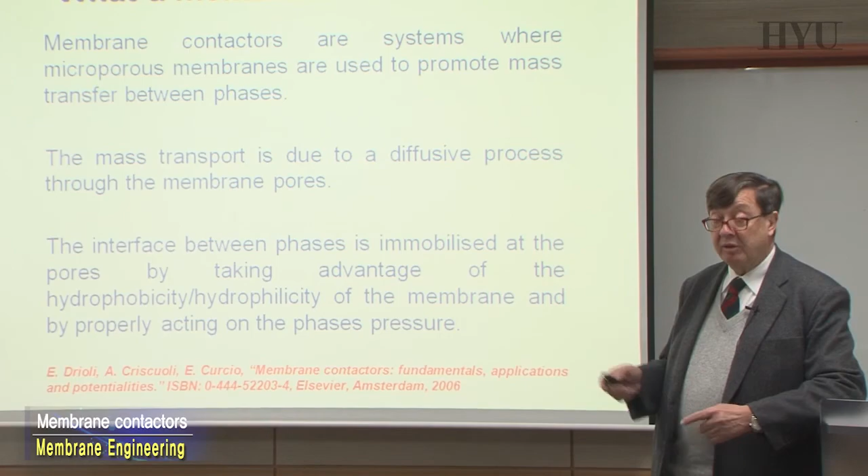Some of these operations are becoming more and more popular—membrane distillation is a typical case. Others are also in progress: membrane emulsifier is another interesting case. We are developing a study on membrane crystallizers, not yet at industrial level, but very interesting and important for the possibility to improve this kind of operation significantly.

Membrane contactors are systems where, in general, microporous membranes—not dense membranes like in reverse osmosis, gas separation, nanofiltration, or pervaporation—are used to promote mass transfer between phases. By the way, this system already exists in nature: our skin is the best example of a membrane contactor. The mass transport is generally related to diffusion across the membrane pore, and the interface between different phases is immobilized at the pore by taking advantage of the hydrophobic or hydrophilic character of the membrane. This is a very general definition of what we are talking about.

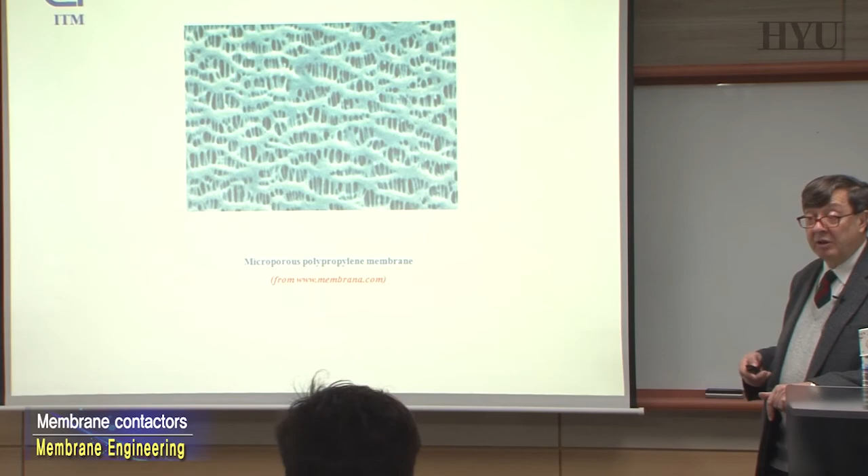By the way, some years ago we wrote a book in this area where you can find some general references. The kind of membranes we will discuss, compared to the membranes we discussed a few lectures ago, are always microporous, so the solution-diffusion mechanism is not part of the membrane system. They can be hydrophobic or hydrophilic depending on the kind of system being discussed.

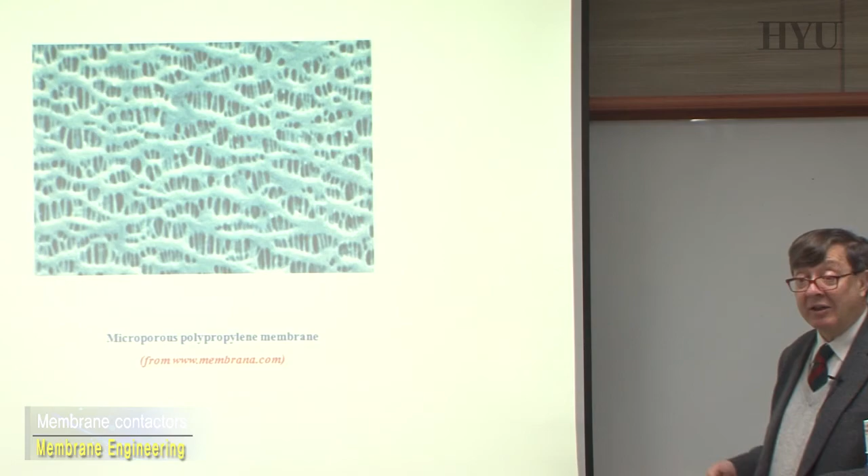For example, most of the systems we are discussing have water as the solvent—aqueous systems—so we will basically use hydrophobic membranes. These will avoid penetration of the liquid phase, the salty water, into the membrane itself, so only vapor passes across. Vice versa, you can use hydrophilic membranes when using non-aqueous solvents to do the same with a different kind of membrane. Non-aqueous systems in membrane contactors are not yet much developed, but it's an interesting research field that will grow significantly.

We will discuss two of the major membrane contactors that are growing significantly and where we have specific knowledge and ongoing research. Number one is membrane distillation, as I was mentioning before.

Distillation is a very basic system present in most thermal separations that people develop today. Membrane distillation, based on membranes, is not yet as common, and you're more familiar with distillation towers where evaporation and condensation take place across different plates of the column. In membrane distillation, the same phenomena take place at the interface between liquid and vapor phase, at the mouth of each pore. Instead of having a thousand different plates as in a distillation column, we will have billions of pores across the membrane.

It's quite interesting to remember that all these properties are very consistent with the basic properties of process intensification: flexibility, modularity, automatization, remote control, very low footprint are all present here.

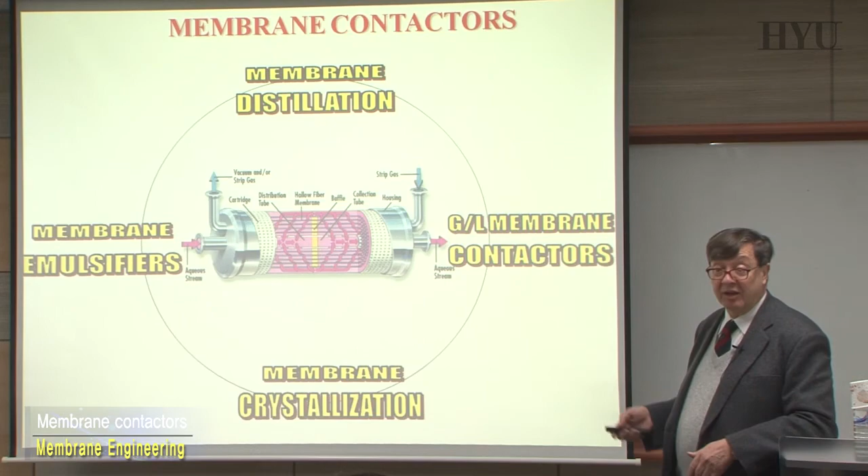The software to operate these membranes as a crystallizer or emulsifier means the operator has to be very smart—knowing the software, the system, and how to change the driving force and operating conditions to make an emulsifier instead of a crystallizer. This is very consistent with the basic properties of process intensification that we discussed at the beginning.

Here are listed the most traditional contactors that we are studying today. And as you can see here, membrane distillation is one.

In membrane distillation, what you have is basically a membrane, microporous, hydrophobic, making contact between a liquid phase and a gas phase or another phase on the other side that can also be liquid, vacuum, or gas. The driving force normally is a delta T, a difference in temperature across, small because this is a porous system.

So if you have to move the gas across, this resistance is relatively not very significant. That can be a typical example of a case in which there are interesting opportunities to realize also on large scale the same units. And the limit to the mass transfer is just the different resistance in the boundary layers on the feed side, on the permeate side, and in the membrane itself.

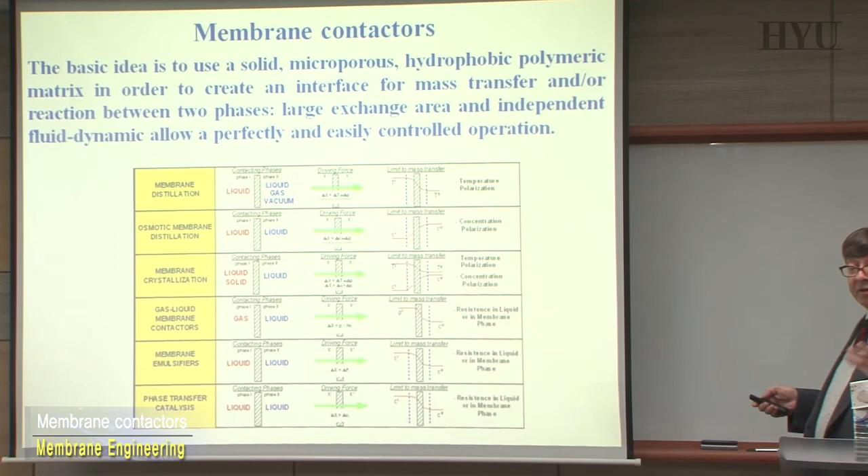Let's anticipate that one of the drawbacks in membrane distillation is not concentration polarization, as we discussed in reverse osmosis, but temperature polarization. This is another kind of polarization that can significantly affect the performance of your system. Colleagues and PhD students around the world are studying and developing modeling to better understand membranes more appropriate for controlling temperature polarization, and that's a significant important area of research for the future.

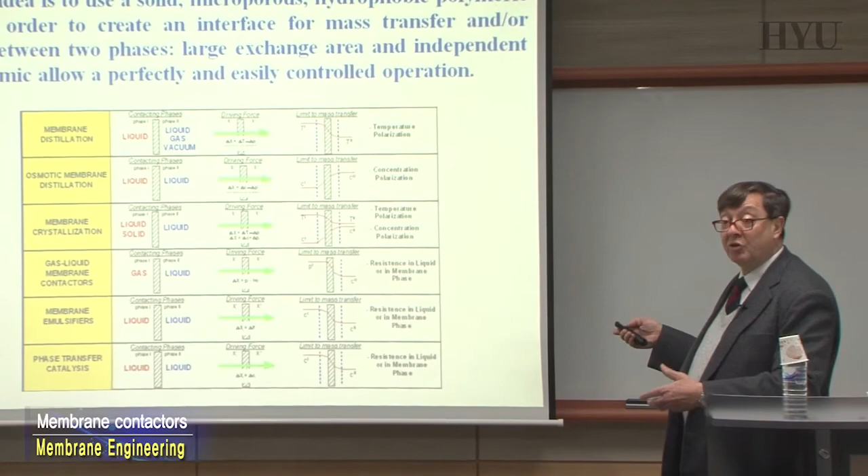There is a modification of membrane distillation we call osmotic membrane distillation, in which we have a significant difference in concentration across our membranes. You can realize the osmotic gradient, similar to what we call forward osmosis. We have a draw solution on one side, very high concentration, that will be able to move water across the membranes.

And in some cases, for some specific applications, osmotic membrane distillation is useful because it improves the performance of membrane distillation itself. For example, when there's a volatile present in the feed solution and you want to avoid this volatile going across together with water, you can use osmotic membrane distillation. We will mention why.

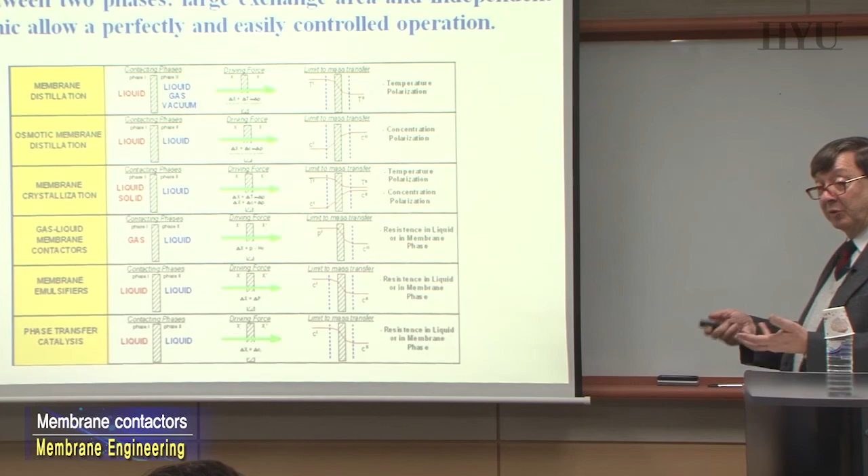What's interesting is that this system can be developed if you understand the mechanism leading to membrane crystallization. Membrane crystallization, for what concerns the hardware, is basically the same units. What you have to do is concentrate to the point that you induce the formation of a supersaturated solution on the feed side. And if you have a supersaturated solution, you can induce crystallization, heterogeneous crystallization.

This is quite interesting, and people in crystallization are now studying it carefully. They are learning about membranes very quickly, because for them it's a totally new way to produce crystals. Crystal is one of the most popular final formulations of most products on the market. If you look at how people are producing pharmaceuticals, food, etc., and how they purify most substances, crystallization is one of the most common ways of doing it.

The final formulation of products you produce are, for example, emulsions. You will also see membrane emulsification, or crystals, or different kinds of powder, but crystallization is one of the most interesting ones. So if you can develop a new system to crystallize product, it's quite interesting.

You will see that in principle, membrane crystallization overcomes a lot of the limits of traditional crystallization or traditional crystallizers. For example, we are able to crystallize specific polymorphs of your mixture. Normally most products appear in different habits when they crystallize. Take amino acids, like glycine: glycine can be in alpha form or gamma form, and the same for most other products.

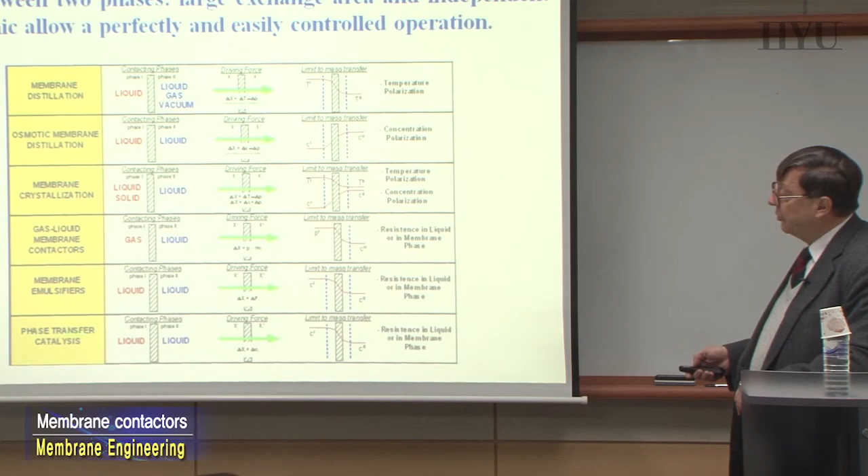You will have other kinds of contactors, such as the gas-liquid membrane contactor, where you can extract and supply gas to a liquid. Membrane emulsification is another very important final unit operation for the formulation of many products. You can also control phase transfer catalysis with a membrane contactor. So there are quite interesting opportunities for doing this.

What is the motivation for trying to develop this kind of system when the system already exists? Because you can crystallize without membranes, you can emulsify without membranes—so why do you have to develop this?

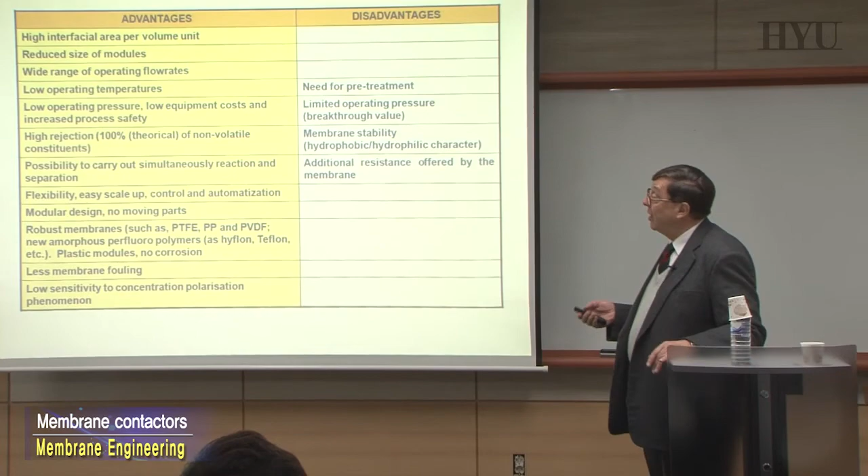Rule number one, most unit operations based on membranes are realizing the strategy, the principle of process intensification. So they are very compact systems, very flexible, with very low footprint. They don't induce too much side phenomena. Environmental impact is minor, etc. So that is rule number one.

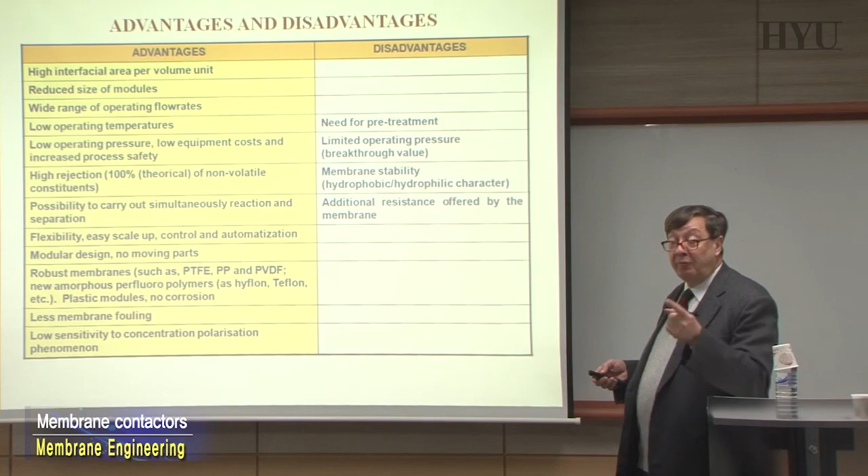Independent from all the other motivations, it makes sense if you believe that tomorrow most processing will require process intensification. That is motivation number one. It's very consistent with process intensification. However, there's more than this.

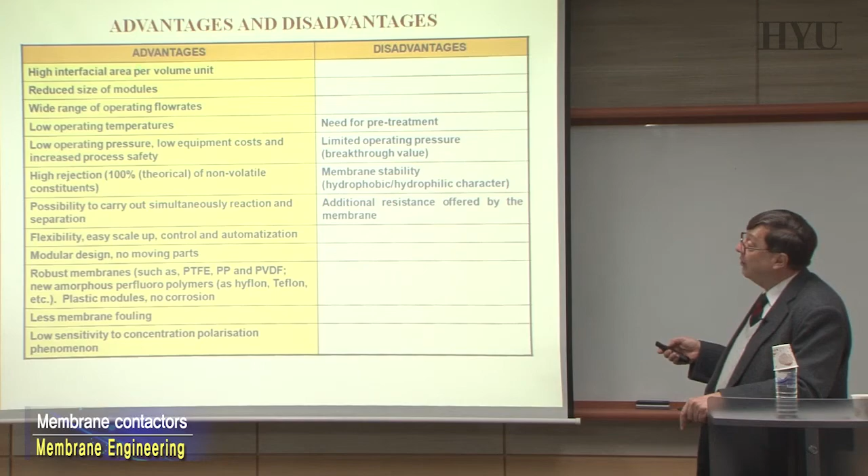For example, most membrane contactors have a very high interfacial area per volume unit compared to normal solvent extraction, distillation, or emulsification systems. Reduced size of the module, wide range of operating flow rates, very flexible in the range of operation.

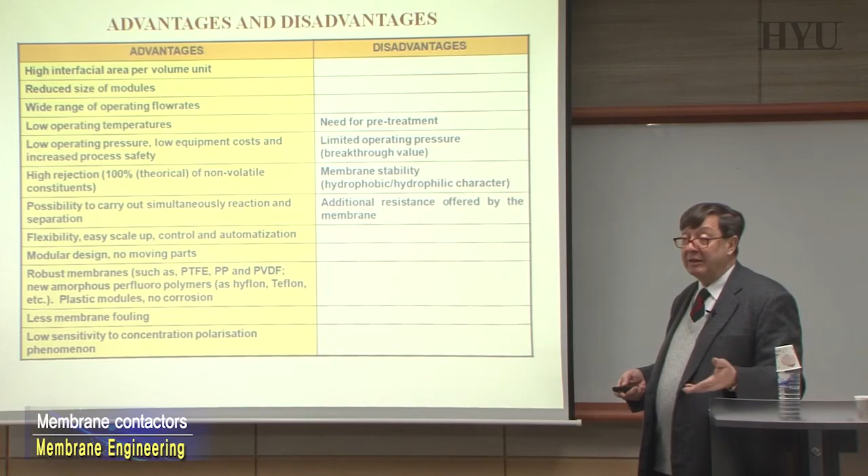They can operate at very low operating temperature. Normal distillation approaches 100 degrees, 90, 120, depending on pressure. In membrane distillation, you operate normally at 30 or 40 degrees. If you want to increase transmembrane flux, you can go to 80 degrees at most, but it's not really necessary. So you can make the same operation at low temperature, which is very important for food application, biotech application, drugs production, etc.

In general, low operating cost, low equipment cost, and pretty safe, no high pressure, no high temperature, etc. In principle, membrane distillation has about 100% rejection. We will see the basics - no salts pass into the gas phase. There's none, compared to reverse osmosis or nanofiltration.

Rejection is always a ratio between concentration upstream and downstream. In membrane distillation, that is theoretically 100%. No sodium chloride will go into the vapor - only water goes into the vapor phase. And also here, you can easily combine separation and conversion. Very flexible, as shown before, allowing automation, possible remote control, modular design.

Membranes are becoming more and more well-developed today. We have good hydrophobic microporous membranes made with polymer, basically amorphous perfluoropolymers. Years ago, there were no real membranes appropriate for this kind of operation. Still today, most of the membranes we use have not been designed for membrane distillation or membrane crystallization - they were designed for microfiltration or ultrafiltration.

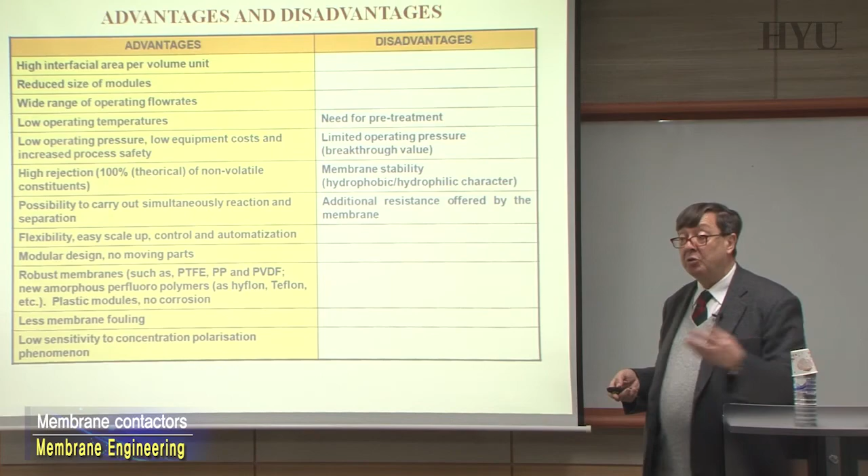That's why some of your colleagues around the world today are working more and more on how to reduce the pore size distribution and produce membranes with as strict and narrow a range of pore size as possible. There are new methodologies for doing this, expensive, but they exist. There is a new way to produce TIPS membranes that some of your colleagues are using in this department, which is one way to reduce the pore size distribution and try to obtain as narrow a one as possible.

That is an interesting result you can achieve. But TIPS has some other problems, meaning you are using polymers with solvents which are not traditional solvents, so that is an area where a lot of work has to be done and is still in progress.

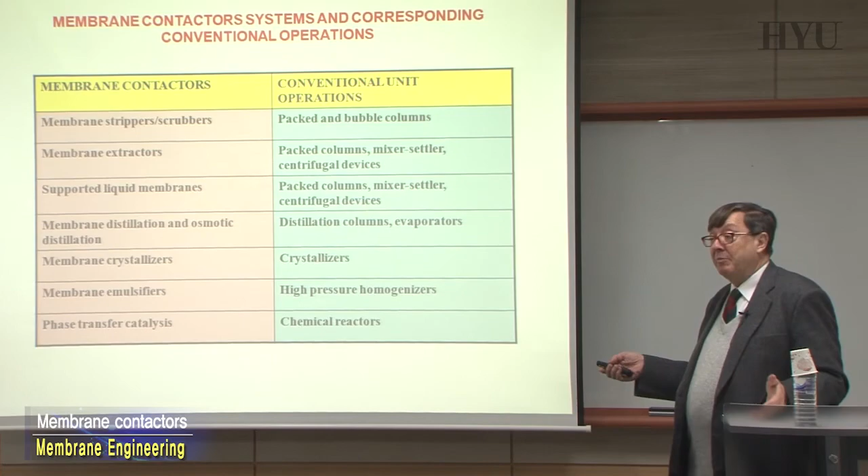I mentioned before that for each membrane contactor we will discuss, in particular membrane distillation and membrane crystallizer, there is a very well established alternative, traditional, conventional way of doing things. So when you want to introduce new technology, you must have strong motivation. You have to convince people that this new technology really gives benefits. Otherwise people say, well, you like membranes, we know about them, but we don't need to change what we have been doing until now. You have to show them there are motivations for changing, good reasons for doing things differently, and slowly people are learning and understanding.

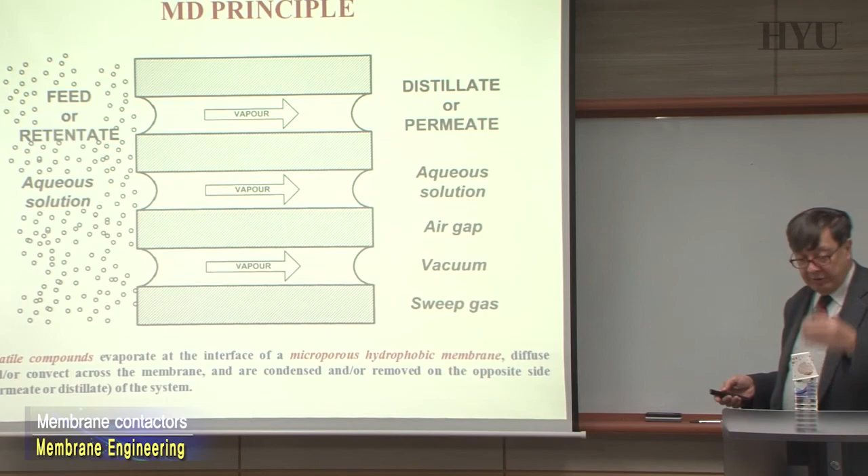So I mentioned we will discuss membrane distillation, and in this picture you have the basic principle of membrane distillation. We have membranes with a significant number of pores of a certain size. The average value can be 0.1, 0.2, or 0.5 microns. That is the typical range in which most membranes today are produced.

On one side of your membrane you have your feed, meaning seawater for example, where the solvent is water in this case. On the other side you can have another aqueous solution, a solvent, water. You can have an air gap, you can make a vacuum, or you can have a sweep gas.

So what's happening here is that at a certain temperature, this membrane is hydrophobic, so the surface energy and pore size are such that no liquid can penetrate. But at the interface between the liquid phase and the vapor, which is in the pore, you have a typical evaporation process: some molecules leave the liquid phase and go into the vapor phase. So the liquid will not penetrate, but single molecules in the vapor phase can penetrate normally, since there is no surface tension to stop just single molecules, so some molecules can penetrate.

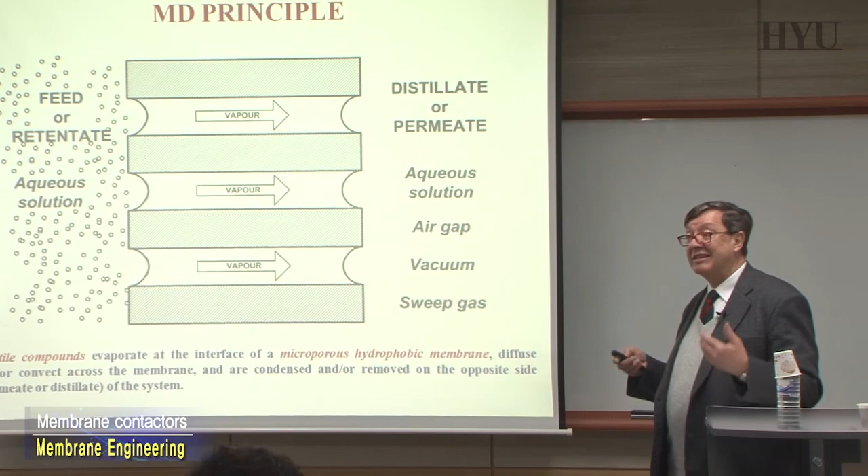Already there is a lot of new design work. There are many engineers studying how to realize this. There's much more interest and effort today in trying to realize this system than in traditional distillation.

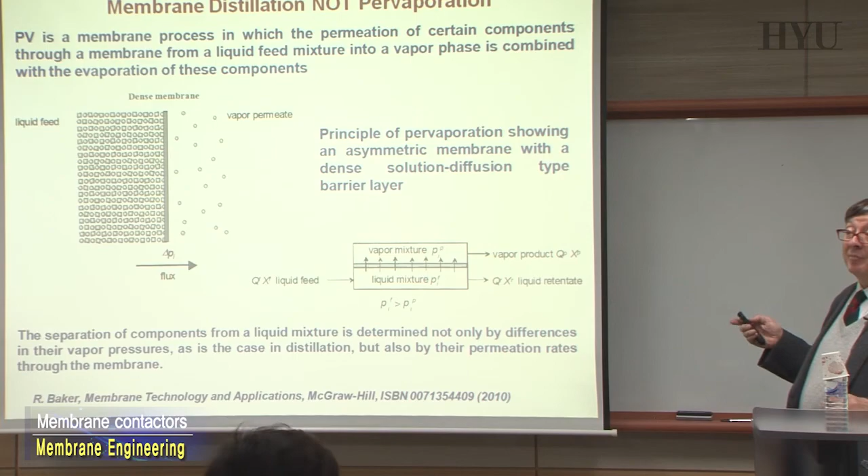By the way, before going to see the different systems, remember that sometimes in the literature there is confusion. People confuse membrane distillation with pervaporation. Pervaporation has nothing to do with membrane distillation. Some people call it thermal pervaporation just because there is a temperature difference, but membrane distillation and pervaporation have nothing to do with one another.

First of all, in pervaporation you have dense membranes, the same membranes you would use in reverse osmosis or nanofiltration. What you have in pervaporation is nothing more than a solubility-diffusivity type of process, exactly as in gas separation or reverse osmosis. What is new is that the driving force and the final properties of the system are not just related to the difference in vapor pressure of the components across the membrane, but also to the permeation rates. So you have a combination of the vapor pressure difference across your membrane plus the permeation properties of the dense membrane system. That is what makes pervaporation interesting for some applications.

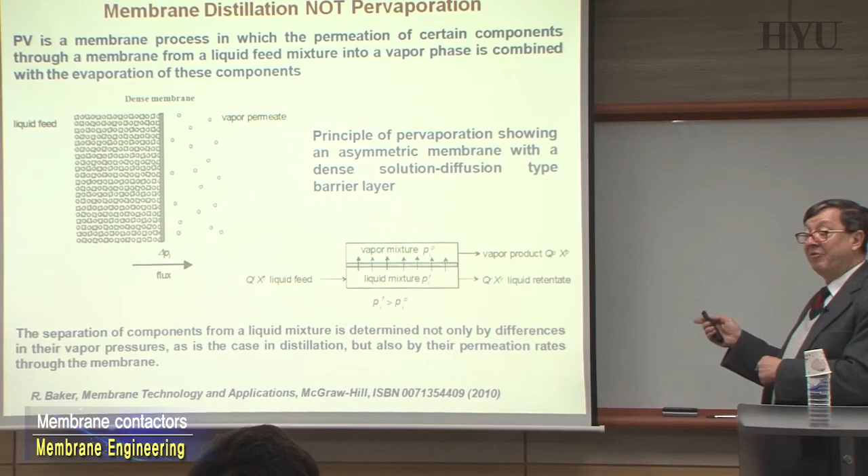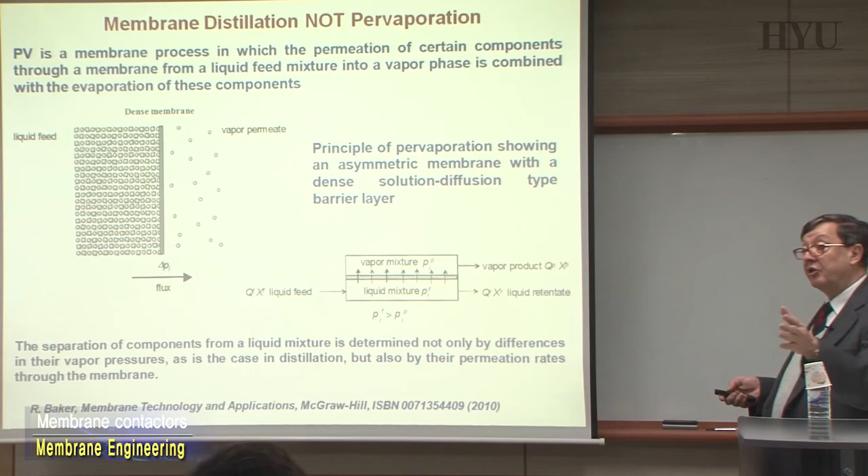We will discuss pervaporation a bit if we have time, but remember pervaporation has nothing to do with membrane distillation. So when somebody tells you it seems like pervaporation, you say no. Pervaporation is a dense membrane where vapor pressure and permeation work together, compared to normal RO. Membrane distillation is a system where mass transfer across is only in vapor phase. You have evaporation and just transfer across. Very different, and you're using microporous hydrophobic membranes, not dense membranes at all.

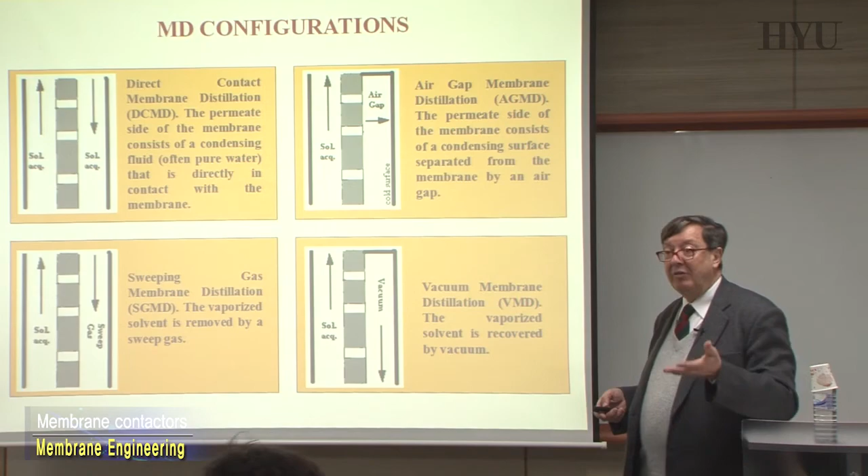I was mentioning you can realize this concept in different forms, and new ones will probably appear. Already good researchers and engineers are studying how to optimize the system to overcome some of the drawbacks. For example, to optimize it - today we are losing about 50% of the energy we are supplying. Instead of using this energy for evaporation on the feed side, we are warming up the polymer. So we lose about 50% of the energy just warming up the polymer, inducing eventually temperature polarization, which is nothing positive.

Today, the system already relatively well understood and well controlled is what we call direct contact membrane distillation. In this case, the permeate is just water in liquid phase, directly in contact with the membrane on the permeate side. So you have seawater here, fresh water here, and fresh water on the other side - liquid on both sides, and the transfer across the membrane is in vapor phase. You already have liquid here, and you put a liquid phase in contact on the permeate side. This is the most traditional, the first configuration designed, and the easiest one.

You can have another system in which, on the permeate side, instead of a liquid phase, you have what we call an air gap. You have just air, and a condenser at a certain distance from the bottom side of your membrane - so in the middle is the air gap. The permeate side is a condensing surface separated from the membrane by this air gap.

Instead of just having an air gap, you can have another configuration where you introduce a sweeping gas. That means you have a sweeping gas circulating, which helps extract the water. So the vaporized solvent is removed by the sweeping gas, basically, instead of just by condensation.

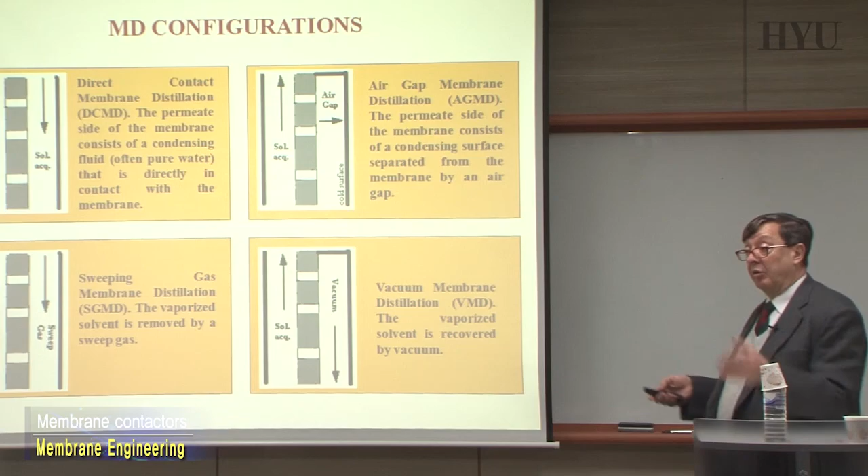Basically there is no concentration profile, no temperature profile that can create some problem. So these are traditional four kinds of systems, and all of them have some advantages, as always, and some drawbacks. That's why we already have four.

Keep in mind that in fact we don't have just four today. We have already about six, because some people are introducing modifications and trying improvements. This is an area where chemical engineers will have a lot of work to do in the next years, when this field will grow and become a big plant.

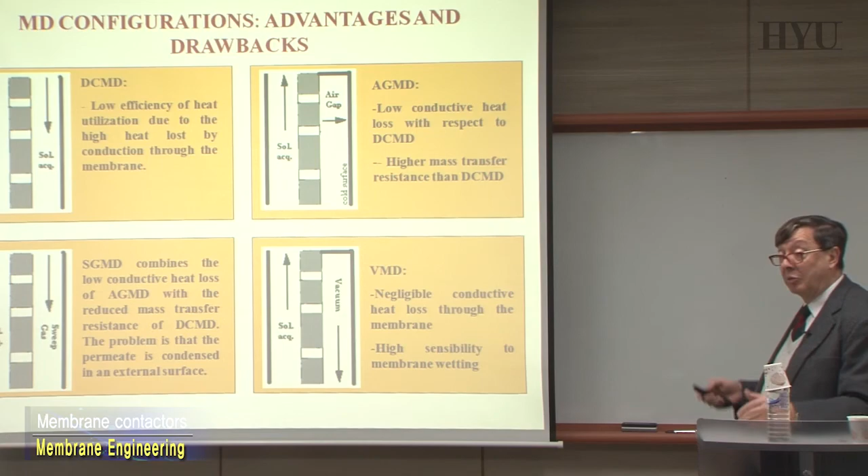For example, for what concerns direct contact membrane distillation, you have a low efficiency of heat utilization because we have a significant heat loss by conduction through the membrane. The heat that you are supplying to the system, instead of being utilized for evaporation of the water, is utilized to warm up the polymer, and you create a temperature gradient across. That lost heat can be about 40-50% of the energy.

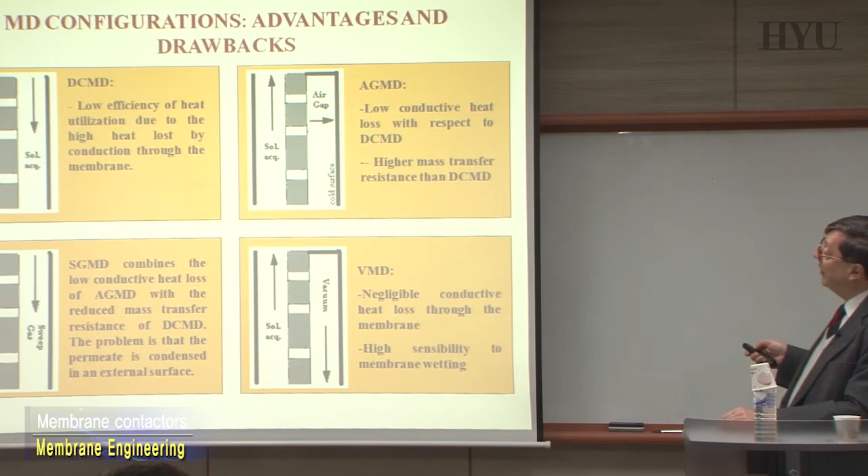In air gap membrane distillation, again you have a lower conductive heat loss with respect to direct contact, so this is an advantage, but you have a higher mass transfer resistance than in DCMD. For what concerns the sweep gas system, you combine low conductive heat loss with reduced mass transfer resistance.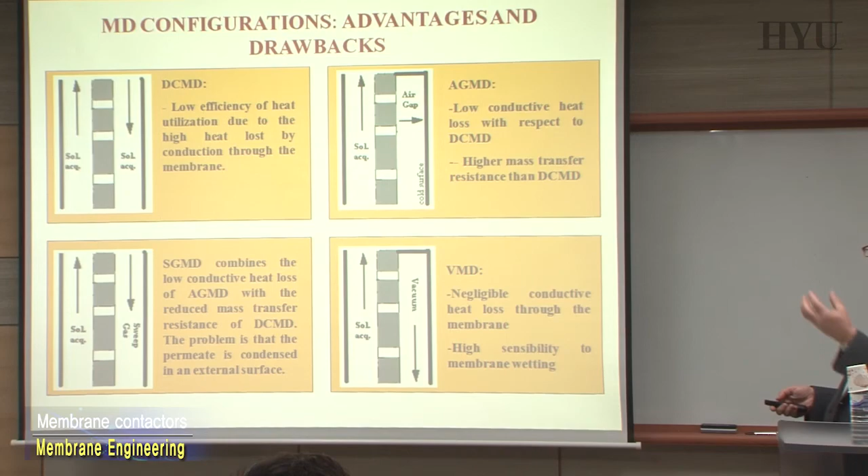What's happening here is that the permeate is condensed on an external surface. You have a certain distance between the membrane and the plate where condensation takes place, and afterward you have to remove and recollect it, and that is a cost you have to consider.

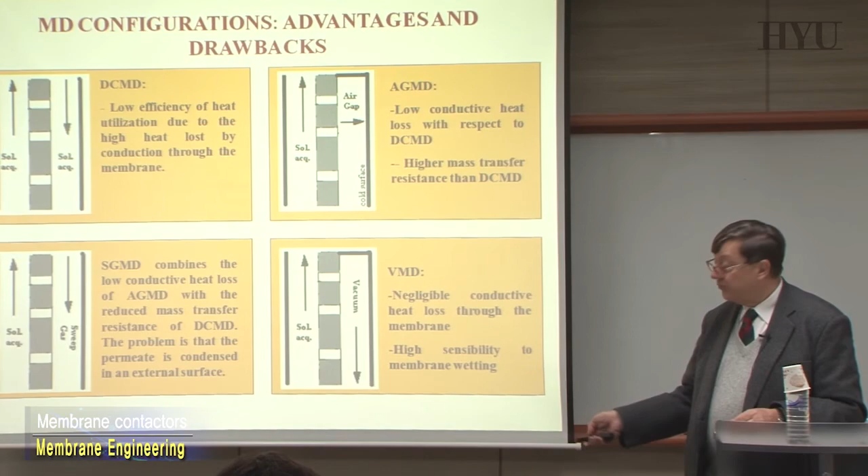In vacuum membrane distillation, as I mentioned before, we have negligible, very low conductive heat loss through the membrane - this is relatively not very important. However, in this case the membranes are very sensitive to any problem of wetting. Wetting means that your hydrophobic character can slowly disappear, becoming hydrophilic, and that can be a problem you have to solve.

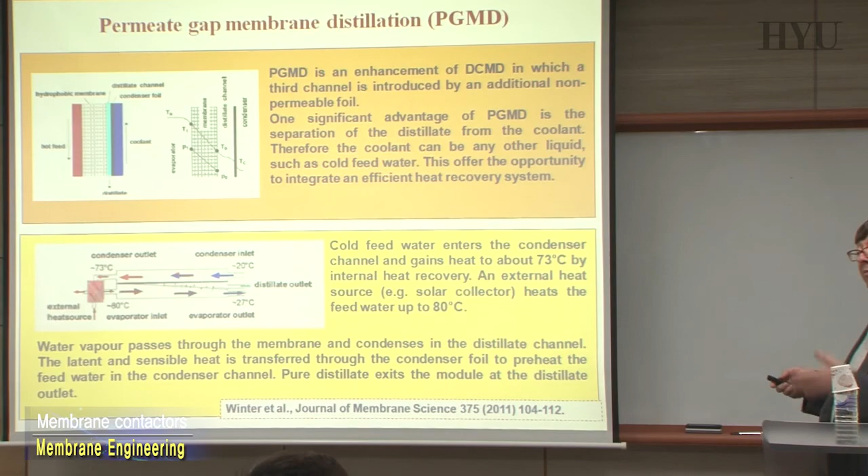Just to mention shortly, already now when you look at the air gap membrane distillation system, there are some modifications. For example, there are people in Germany at the Fraunhofer Institute for Solar Energy who are developing a system in which they introduce a third channel with a non-permeable foil. This membrane foil can be polymeric or metallic, and allows you to realize condensation and recovery of the heat you are losing during evaporation in the system.

So that is a kind of system with heat recovery - part of the heat you are losing is recovered in the system, in the module itself. And that is a way to introduce better performance.

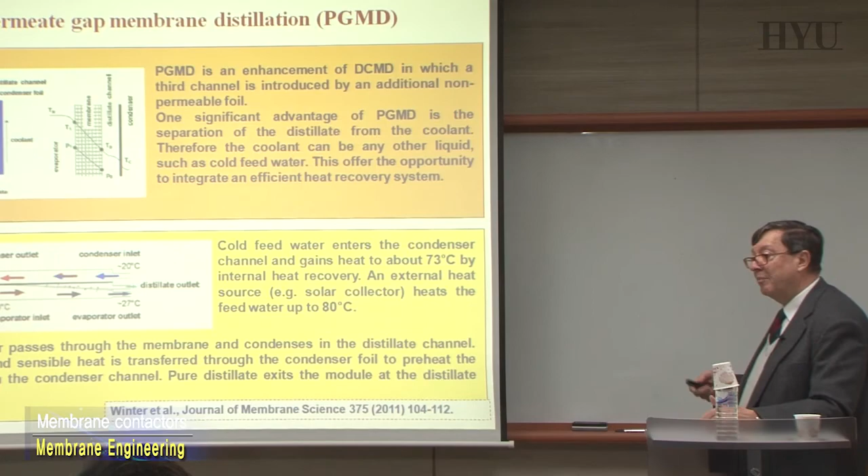This system really works nicely in terms of heat recovery, but if you look at real life, you realize that what you gain from the heat recovery system, you lose in the transmembrane flux. The overall transmembrane flux goes down with this kind of configuration with the third plate, and the recovery of heat is not completely positive considering you're losing transmembrane flux, to the point that these big modules are still under study.

A lot of people are looking into this, but if you want to find a real plant, you won't find them, because some work still has to be done.

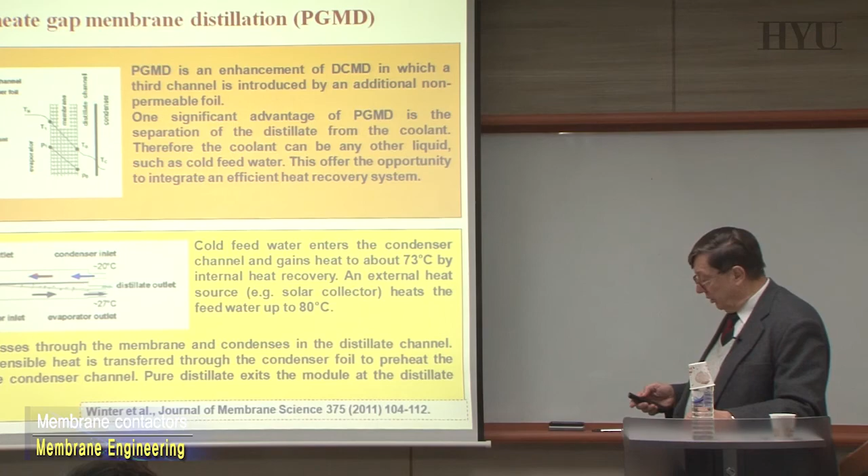However, this is an example of what can be done, but it's not yet realized on a large scale. And there are some other configurations of this kind.

For example, if you go into the literature, you'll find other examples where people try to realize in membrane distillation units the same cascade system you have in normal distillation. Instead of having evaporation and condensation in a single plate, they put different chambers with the membrane where you evaporate and condense across the membranes, reproducing the same configuration as a traditional distillation tower. So there are different ideas trying to develop this as much as possible.

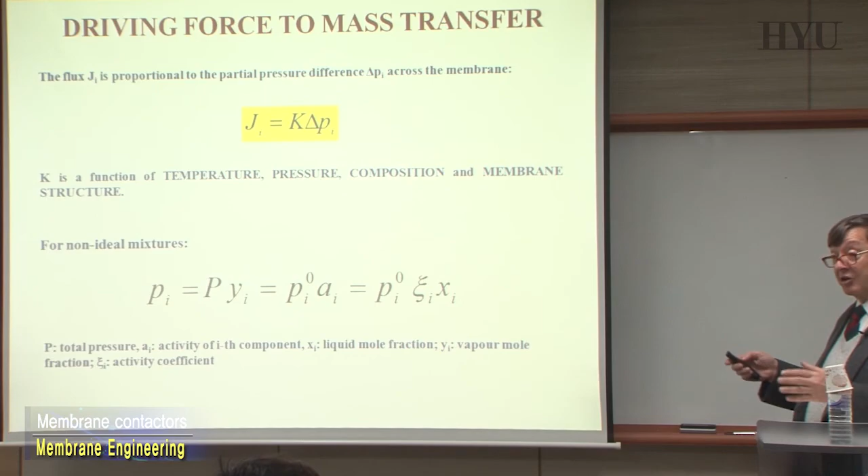You will receive, I think Nazer will send you a review from a few months ago on membrane distillation, where you will find a lot of references related to what we are discussing. And if you're interested, you will also receive a link to what is called a virtual issue on membrane distillation in the journal Membrane Science.

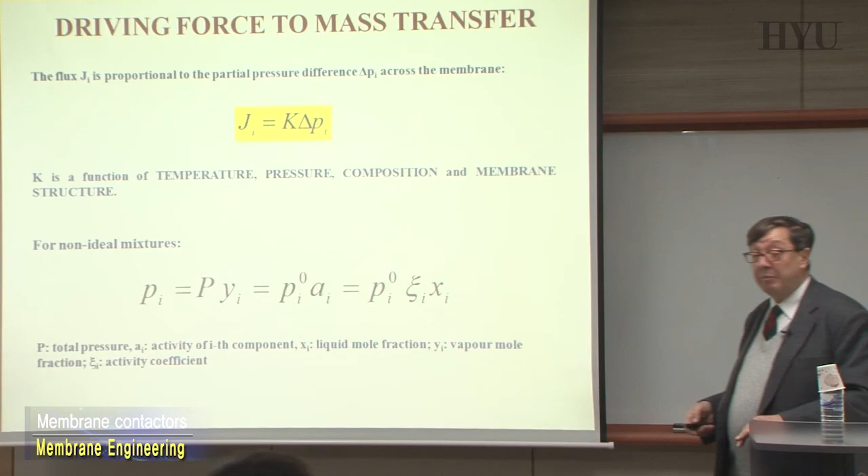We made a kind of survey of everything published in membrane distillation in the last 30, 40 years, summarized and listed, and we selected from about 200 papers the 30 or 40 that, in our opinion, are the most interesting. One of your colleagues, our PhD student in Italy, Amir, helped me make this virtual issue. So you can find everything on membrane distillation published in Membrane Science there, a nice summary, so you don't go crazy, plus the review paper published a few months ago.

Which are the driving forces for mass transfer in a membrane distillation unit? Basically, the transmembrane flux is always proportional to the difference in partial pressure across the membrane. So we have the traditional equation that is now familiar to you: the flux is proportional to a term of proportionality that can be a function of temperature, pressure, composition, and membrane structure, and the driving force is delta p_i.

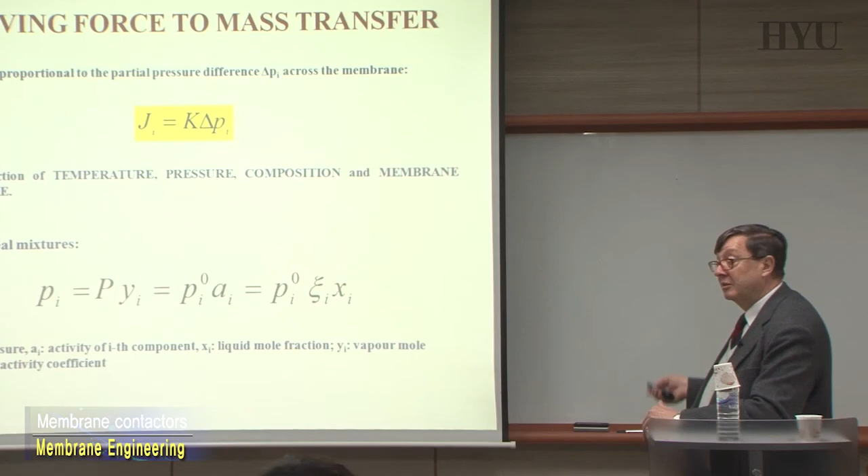Keep in mind this relationship can be written more carefully, because pi is just the partial pressure, but the system we are working in very rarely behaves ideally. The probability that we are working far from ideality is very significant, to the point that we normally use membrane distillation to concentrate water and to crystallize. So we go to very high levels of concentration, and we just have to consider that the system is not ideal, so we cannot use this simple equation.

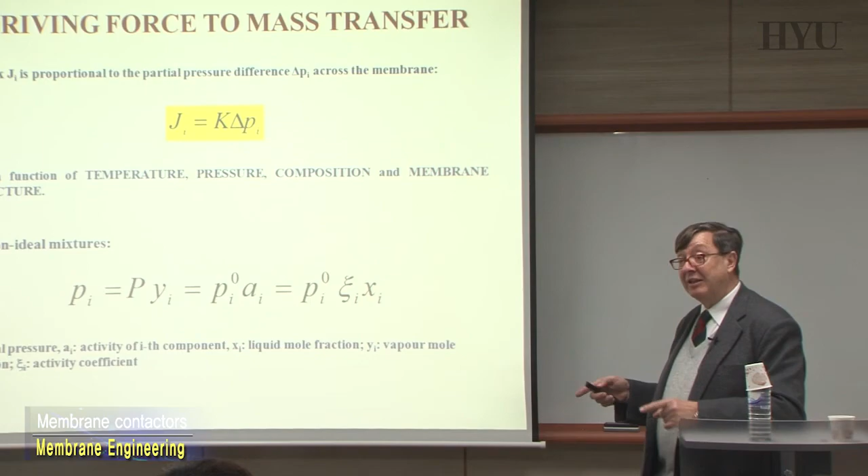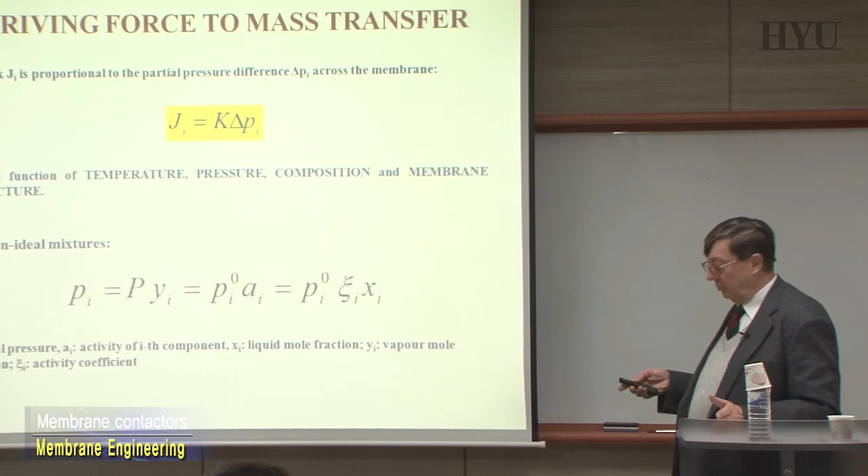We have to introduce an activity coefficient. At very high concentration, the activity coefficient is not obvious, and you have to find the appropriate level of deviation from ideal behavior. This is important in membrane distillation, because if you just use the ideal vapor pressure, the driving force of your process can be significantly affected by errors. You want to calculate the driving force of the system, the amount of water that will go into the vapor phase, and if you don't use the correct expression where vapor pressure is related to the molar fraction through an activity coefficient, you make significant mistakes.

The relationship between vapor pressure and temperature, I think, is very well known to you. It's not linear - the Clausius-Clapeyron equation - and remember it's an exponential behavior, which means that at low vapor pressure and low temperature you have a relatively linear variation of vapor pressure with temperature. But as soon as you increase a little, this becomes exponential, meaning much more vapor goes into the vapor phase as you increase temperature, with no linearity. In fact, the transmembrane flux with increasing temperature will always have this kind of exponential behavior, never just linear.

In any experiment you can check this, and you should expect it. If you have a linear behavior, something is wrong in your system - you don't have a vapor phase carrying the mass across, you may have some liquid going across, etc. So it's something you have to check and expect.

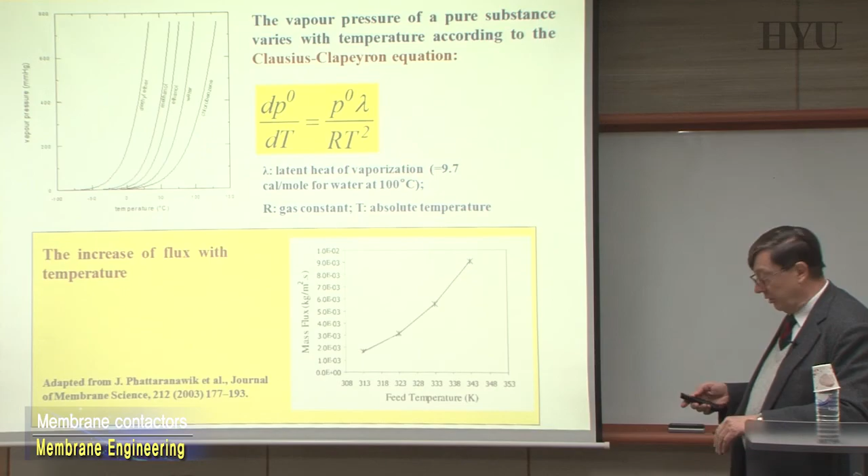Be careful, there are some other deviations from the traditional equation you are using, because at the entrance of each pore, the liquid phase is not flat but has a kind of curvature at the vapor-liquid interface. There are equations, the Kelvin equation, that let you correct and obtain the correct vapor pressure taking this curvature into account, and this correction is a function of the radius of your pore.

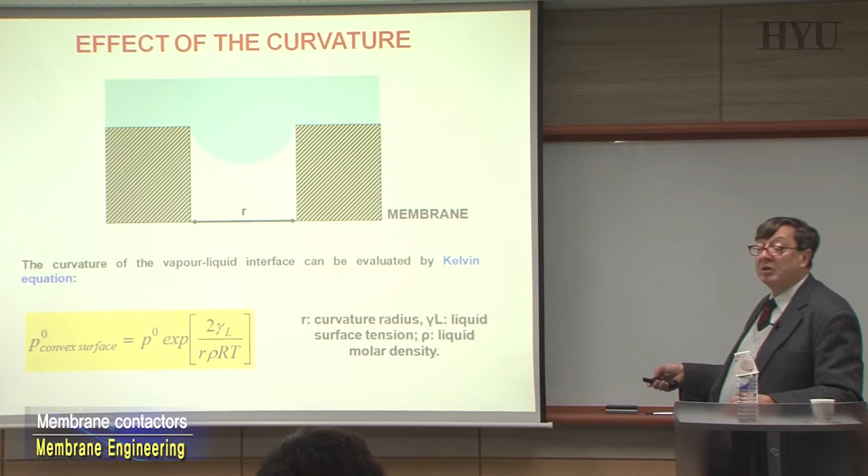Depending on whether the pore is becoming bigger or smaller, this deviation from ideal behavior changes as a function of surface energy and liquid molar density. All these parameters are present in the Kelvin equation. So the normal vapor tension is not the traditional one; when you have a porous system with pore size of the order of 0.2, 0.1, it's not very small, you have to calculate the vapor pressure using a correct equation, not assuming ideality.

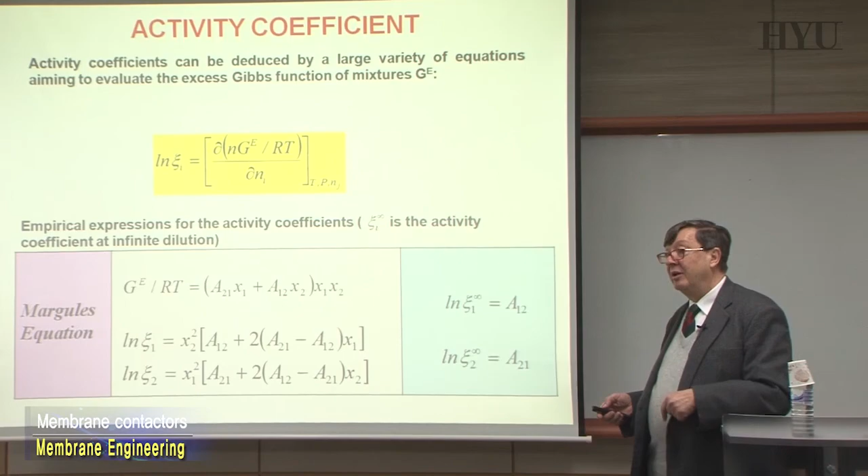Here, just to give you an idea of the complexity, take the activity coefficient. If you want to know this for your solution and eventually your mixture, normally you don't work with a single component solution, it's not just water. It's water plus salt, and normally not one salt, but water plus a variety of different salts. So to have a correct value of the vapor pressure in your system, you have to assume an activity coefficient for the system, which is not easy to determine. It's not only one answer - you can have different relationships for activity coefficients in terms of Gibbs energy, temperature, and other parameters. In the literature you'll find the Margules equation, the Van Laar equation, the Wilson equation, and others.

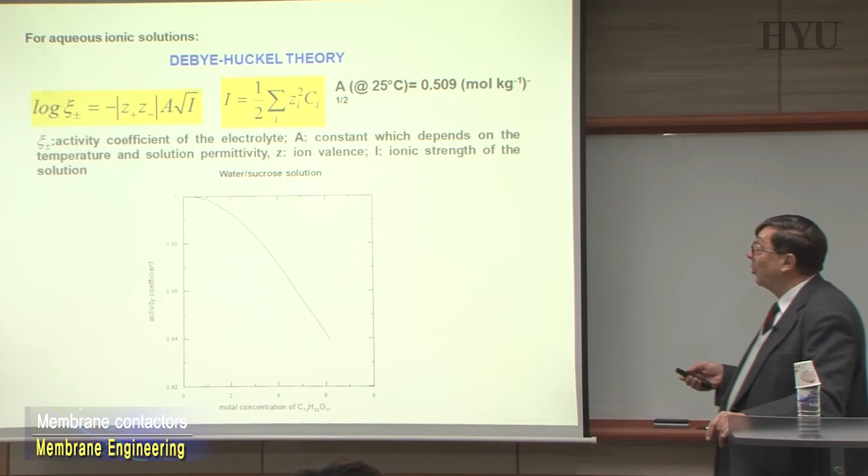The most interesting one, and easier to remember, is the relationship developed by the Debye-Hückel theory, which I've mentioned a couple of times already. It tries to describe the behavior of any electrolyte solution where you have different ions, positive and negative.

These ions don't exist by themselves. Each ion is covered by clouds of charge of different sign compared to the central one, distributed in a certain way, called Debye clouds. There is a Debye radius that you have to calculate, and these clouds control the interaction between different ions. The different ions don't attract or repel each other simply based on their size and charge; you have to account for the clouds of opposite-sign charge surrounding them. This creates a deviation from ideal behavior, measured by the activity coefficient.

For this, you find an interesting relationship where you can introduce the activity coefficients we mentioned before, related to what is called the ionic strength of your solution. I already mentioned this when we spoke about the Donnan effect, etc. The ionic strength of the solution is nothing more than the sum, over all the different ions, of concentration multiplied by the square of the charge of each single ion.

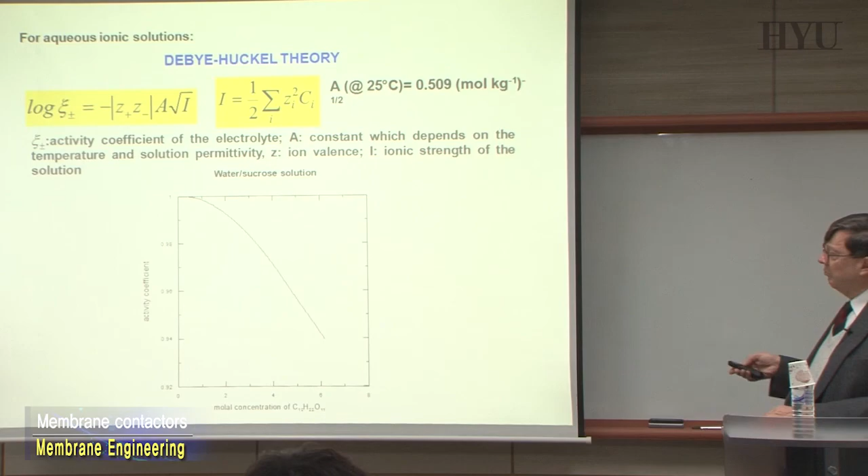This is a clearer equation to remember, and you can see experimental deviation of the activity coefficient, for example, as a function of molal concentration for a sugar solution. You can see there is significant deviation as concentration increases - it's not constant for sugar, it's not linear for sugar. The situation is a little complicated.

That means when you want to make calculations for large plants and you want to know exactly the driving force moving water vapor across the membrane, etc., you need to know exactly the activity coefficient of the solution you are going to concentrate on one side of your membrane.

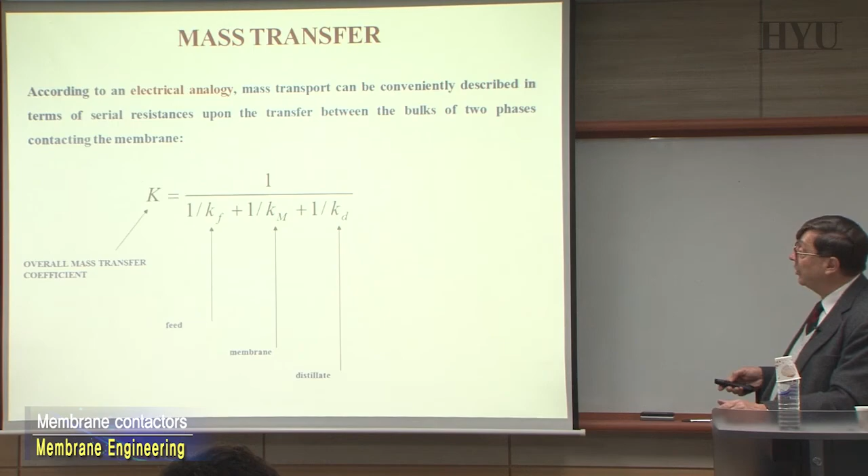Mass transfer across the membranes is related to the mass transfer coefficient, basically related to the different kinds of resistance you will find in the system. We discussed this a little before, but in this kind of system you will have a mass transfer coefficient for the resistance on the feed side, in the membrane itself, and on the distillate side. These are the three mass transfer coefficients we have to define and introduce into our general equation.

You can visualize it this way: there's a boundary layer resistance on the membrane surface on the feed side, a boundary layer resistance on the permeate side of the membrane, and a viscous resistance - the membrane resistance, which is the viscosity within the pores of the membrane.

Do we have something that works? Let's see if this one is better.

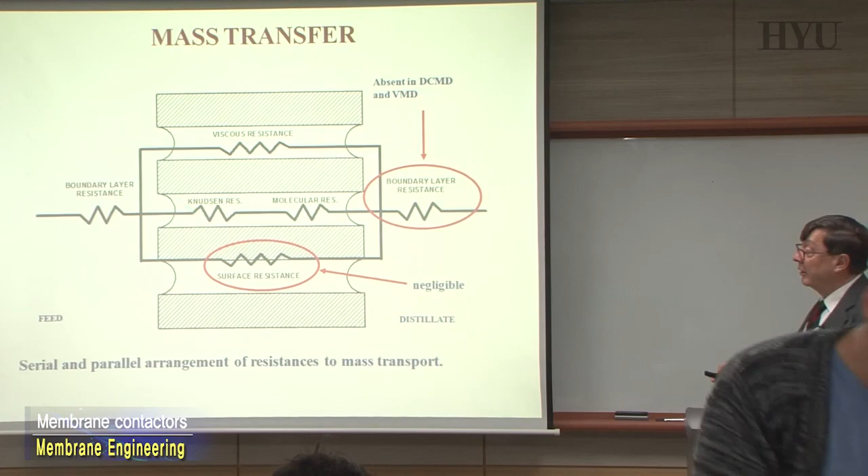So we have a viscous resistance in the pore of our system, and we can have Knudsen resistance or molecular resistance or surface resistance. Normally now, when we are working with membranes with a certain level of porosity, 0.2 micron etc., this surface resistance is, in first approximation, negligible. You can cancel this situation.

Normally in direct contact membrane distillation and also in vacuum membrane distillation, the boundary layer resistance is also negligible on the side. So what is normally effective, what you have to consider, is this Knudsen and molecular resistance in the pore. Normally, in most parts of the membranes we are using today, where the pore size is of the order 0.2 microns, today we are working and assuming that both of them are present. So if you want to compare experimental results with the prediction, you have to assume there is overlapping or integration of molecular resistance with Knudsen resistance.

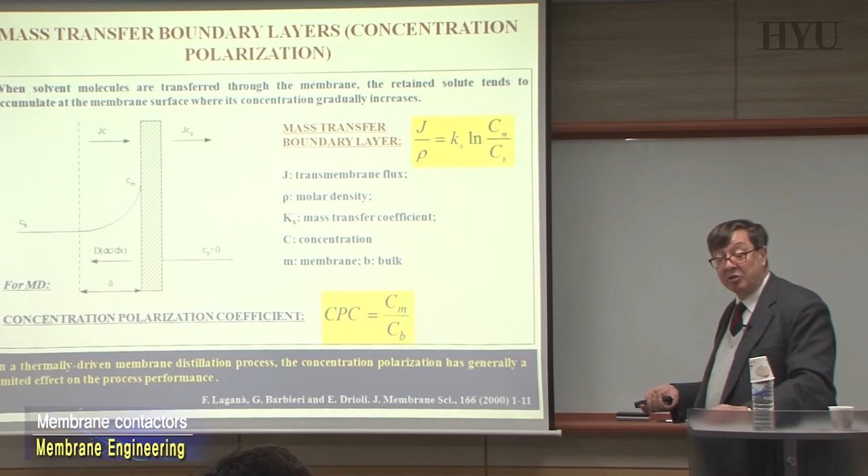That's one typical case. Now, if you want to study the important effect we have been describing already in most parts of separation membrane operation as concentration polarization, you can use exactly the same approach we have been using in reverse osmosis. You can define the situation, the transmembrane flux you have in your system, and define a concentration polarization coefficient given by the ratio between the concentration at the membrane interface and in the bulk. That means the concentration here and the concentration in the bulk.

Also in membrane distillation, you can create some concentration profile. However, in this case, this change of concentration does not affect too much the driving force in your system. There is no big effect. There is no osmotic concentration that you have to consider here. So this effect is practically negligible, and much more important eventually is the increasing of viscosity when you increase too much the concentration. So in first approximation, we are considering that concentration polarization has a limited effect on the process performance, and that has been very well defined until now.

If you want to find, with some detail, the different mass transfer coefficients we are discussing, you can correlate through the Sherwood number, Reynolds number, and Schmidt number, and you will find different correlations in the literature where people have been studying to try to describe the equation. Depending on the flow dynamic condition in which you are, whether laminar, turbulent, or tubular, and depending on the different geometry, you can find different references from people working in membrane distillation.

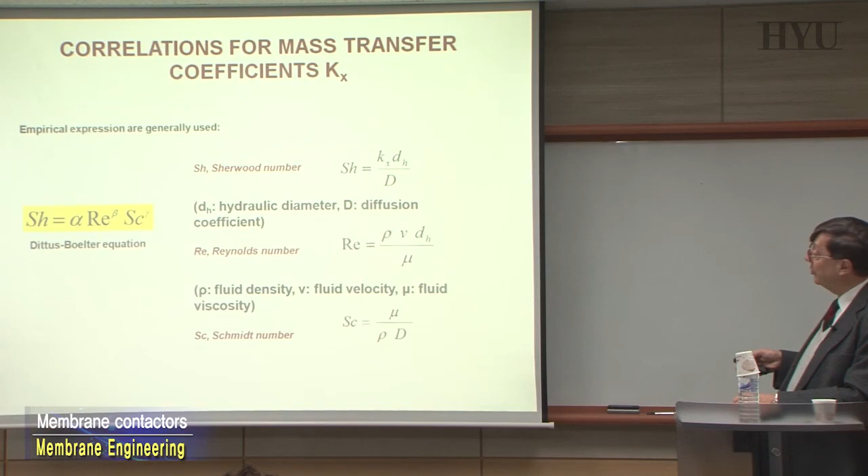You can see here that there are different kinds of relationships that have been defined, where you can find phenomenological expressions for alpha, beta, gamma. Alpha, beta, gamma are just the relationships that correlate Sherwood number with Reynolds and Schmidt number, giving you the mass transfer coefficient. These numbers have been phenomenologically derived, and depend on the different situation and different kind of cell.

Stirred cell, tangential flux, hollow fibers with helicoids where you have Coriolis acceleration that can control the surface concentration, or also some inclination, some profile on your membrane. You can have different kinds of relationships.

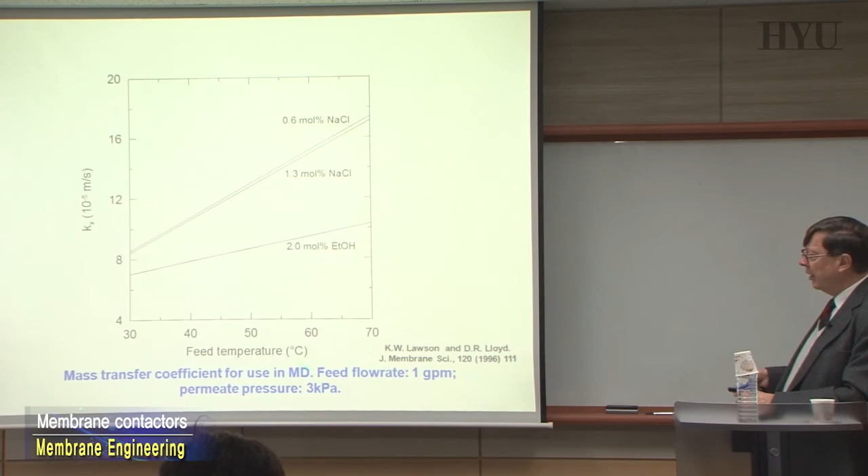Here the effect you can have, for example, mass transfer is a function of the feed temperature, and that is a typical expression. Again, you can find this linear relationship as a function of the concentration of the species, going from 0.6 mol% to 1.3 mol%. There's not a big difference, confirming what we were talking about before.

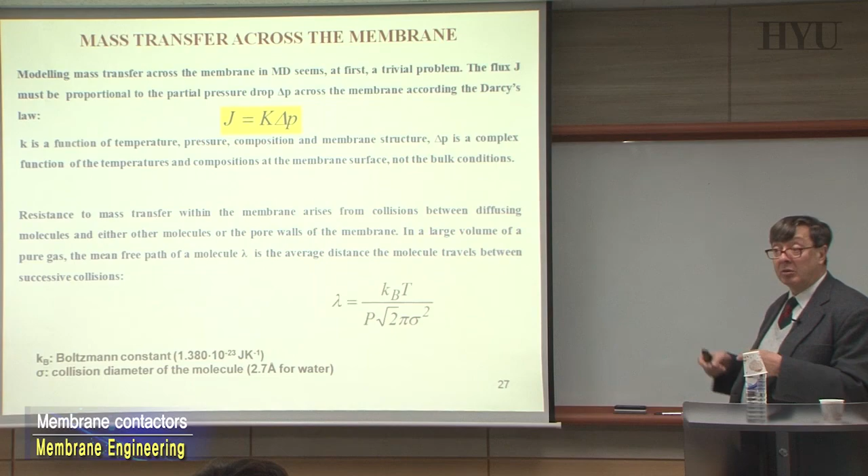Across your membranes, that is the typical relationship we have to consider. Now the point is, if we want to consider viscous flow, Knudsen flow, or surface diffusion, etc., traditionally you can introduce the definition of mean free path of a molecule. That is the average distance the molecule has to travel before colliding with the surface. There are situations where it's much easier to have interaction with the surface and not between molecules, depending on the size of the pore.

You can have a situation in which there is Knudsen diffusion, where there is a predominance of collision between molecules and the membrane walls, and molecular diffusion, where the predominant collision is between single molecules. This molecular diffusion process takes place, is prevalent, when the pore size is higher. So if you go to pores of 0.3, 0.5 microns etc., you are going in the direction of molecular diffusion.

If you go to pore sizes much smaller, at 0.2, 0.1, 0.05, you have Knudsen diffusion. And that makes a difference in the equations controlling mass transfer across the system. Remember that in Knudsen diffusion, small molecules move faster, just because there is a predominant effect, and the bigger molecules stay behind. This is called the Graham equation, which is used to separate molecules. So this kind of system can be different.

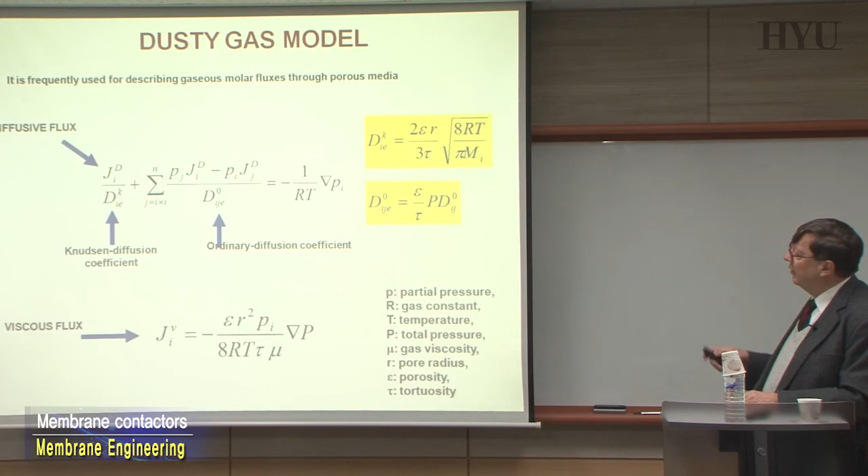In general, with the size of molecules and membranes we have today, the two phenomena are normally present and overlap. That means when writing your diffusive flux across the system, the overall flux across your membrane, you have to consider both the Knudsen diffusion coefficient and the ordinary diffusion coefficient. And if eventually you have to introduce viscous flux, that means the Poiseuille equation, familiar to you, depending on the size of the pore. So this is basically the different phenomena.

If you want to utilize this equation, assuming molecular diffusion or Knudsen diffusion for the different configurations - vacuum, air gap, direct contact membrane distillation - assuming some mean pore size, you have to consider which kind of system it is. For example, for small pore sizes lower than a certain length, the frequency of collision with the wall is higher than the frequency between single molecules, the mean free path. And here you have just Knudsen diffusion.

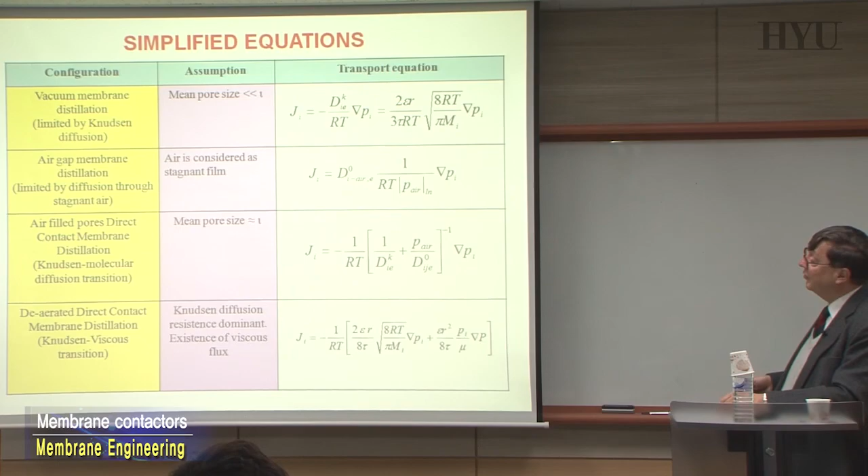Here you can have diffusion through stagnant air. You can have Knudsen diffusion and transition diffusion, and you can have just Knudsen viscous flow. At the end, each one of these systems will give you a different kind of relationship, utilizing different equations.

All this, at the end of the story, is not very important, because the change in resistance that we have in the system at the interface does not affect too much the overall transmembrane flux. Concentration polarization is negligible - it means concentration does not have a big effect. What is more important is the heat transfer, which is related.

Until today, people working in this area try to understand more. We always assume heat transfer and mass transfer are totally independent. We don't put any relationship because it becomes too complicated to solve the equations. However, keep in mind that there is a lot of space for improving the simulation modeling of the overall transport phenomenon across our membrane distillation system, where you start to integrate and combine the heat transfer with the mass transfer. Because it's true that the mass transfer does not affect the driving force too much, but

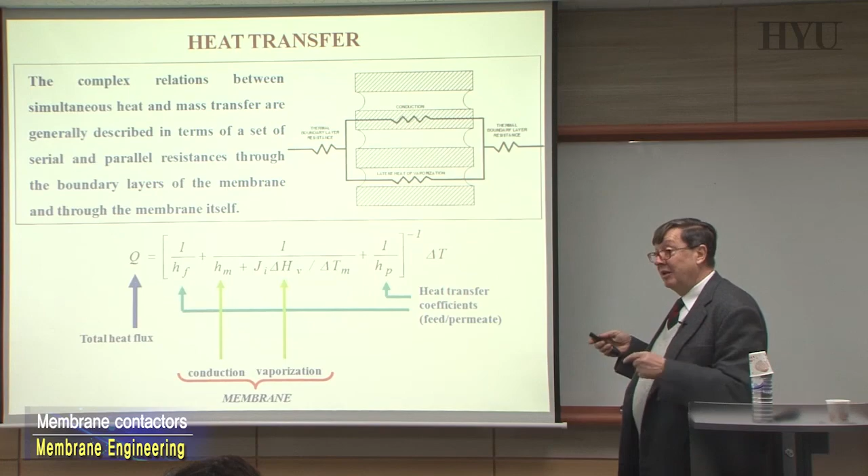concentration polarization can affect not so much the overall mass transfer in principle, but the heat transfer. Because the heat transfer can be significantly affected by changes in the mass transfer also. Until now, if you go in the literature, you'll find models describing one or the other phenomenon, not together. It's not easy, that is the reason. But we know that heat transfer can really kill your process, and that's why it's important to understand how heat transfer can be related eventually to a concentration polarization phenomenon.

Heat transfer is the same story, and here you have that the overall total heat flux across your membrane is related to the heat transfer coefficient in the boundary layer upstream, the heat transfer coefficient of the boundary layer downstream, and what is happening in the membrane phase. Now in the membrane phase, as we already discussed before, we can have different kinds of heat transfer - by vaporization and by conduction.

That means part of the heat you are supplying to the feed side of your membrane is just utilized to vaporize your molecules and put them in vapor phase through the delta - that is delta H of the evaporation step. But part of the heat can be just utilized to warm up the membrane, the polymer, and that's what we don't really want - that is a problem for us. So the principle should be to have, for example, materials with a very, very low thermal conductivity, such that we can minimize any heat warming up of the polymer. But that is the situation that we have.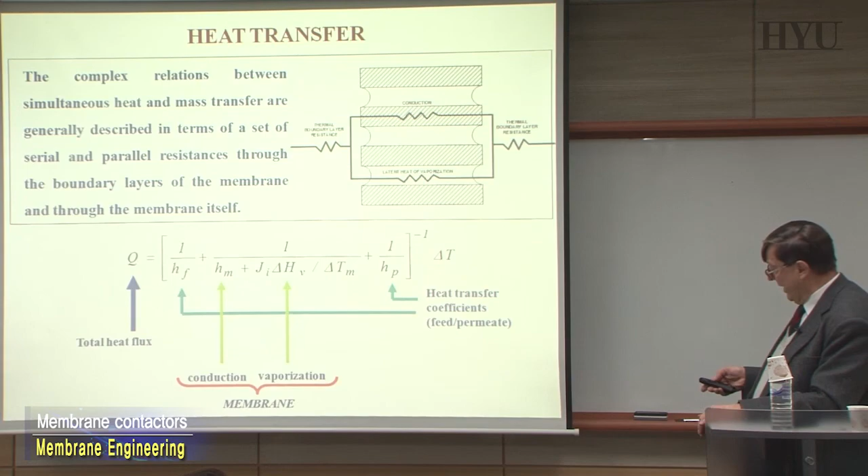So if you want to know the overall heat flux across your system, you have to know all the different heat transfer coefficients. And again, this is the situation: you have a thermal boundary layer resistance on the permeate side, on the feed side, and where it concerns the membrane, the heat transfer is related by conduction and by the latent heat of vaporization.

So these two terms have the one. The one we are more interested in is this latent heat of vaporization. This one, really, we are not interested. If we can avoid it, should be nice. Not easy, but that is the situation.

Also in this case, keep in mind the phenomena we are discussing is totally different from concentration polarization. As you remember, in concentration polarization, what is normally happening is that the concentration at the membrane side is going up. You accumulate some of the solutes that are not crossing the membranes because the water, the solvent, is going out. So you increase the concentration, and you have an increasing concentration at the membrane interface.

What is happening here is just the opposite. Here you have the temperature that you are supplying, that you are assuming 100% useful to create delta T across the membrane and moving the mass across, is just going down because you utilize part of this temperature, heat, for the evaporation. So you use it in the right form. You're spending energy to evaporate, and this vapor phase is going across the membranes. But the other part is you are just warming up the polymer, and we don't need this.

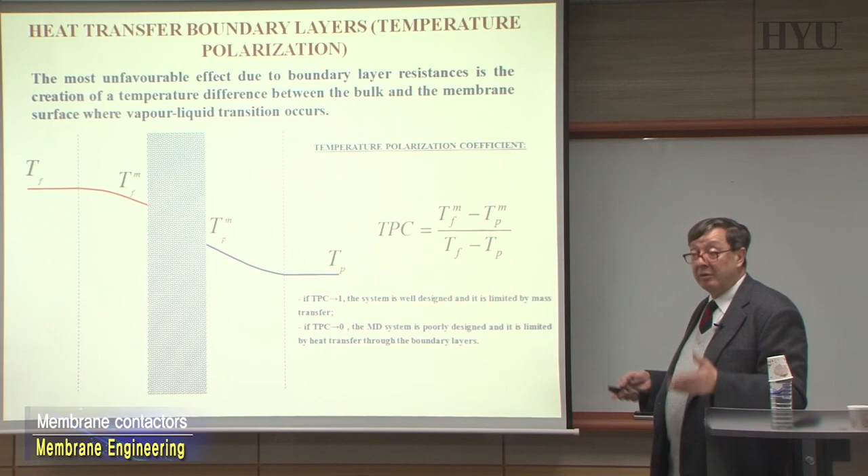So if you don't keep control of this temperature profile, you are decreasing two very important things. One, you are decreasing the number of molecules that go from liquid phase into vapor phase. Second, you are decreasing the delta T necessary for moving these molecules across. Delta T can be very small because this is a porous system, so you don't have big resistance. However, it's a loss of driving force. So this phenomena can kill membrane distillation completely if not well controlled.

Exactly the same as we discussed when we were discussing reverse osmosis. You will find in your notes, if you don't take care of the concentration polarization, seawater is going across your membranes and you are assuming there is a pore. It's not. It was a wrong operation that you have been carrying on. You are not keeping control of the concentration at the interface. So the membrane was working with 99.9% rejection against a solution that was not seawater, 0.5 molar, but the interfacial concentration was 3 molar. And with 3 molar seawater, you get 99% rejection. Same story here as final results.

So you have to keep control of thermal polarization. Our PhD students today in Italy are mainly working on better understanding, developing, and measuring this with a cell with 16 electrodes all around to measure the temperature profile that you create across the membranes. It's not easy, but that's what has to be done.

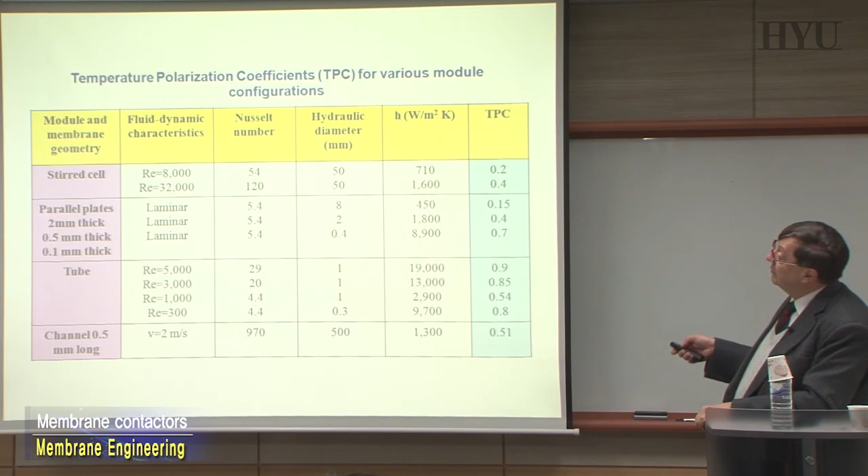In fact, here you can have evidence of the temperature polarization coefficient. You can see here 0.2, 0.4. In some cases you are approaching the ideal case, but normally we are pretty far. And this is under different conditions. In case you see here, if you are having a stirred cell with Reynolds 8000, you have 0.2. When you go to Reynolds 32,000, with high mixing etc., you improve to 0.4. Still not ideal, but that is the effect of the stirring.

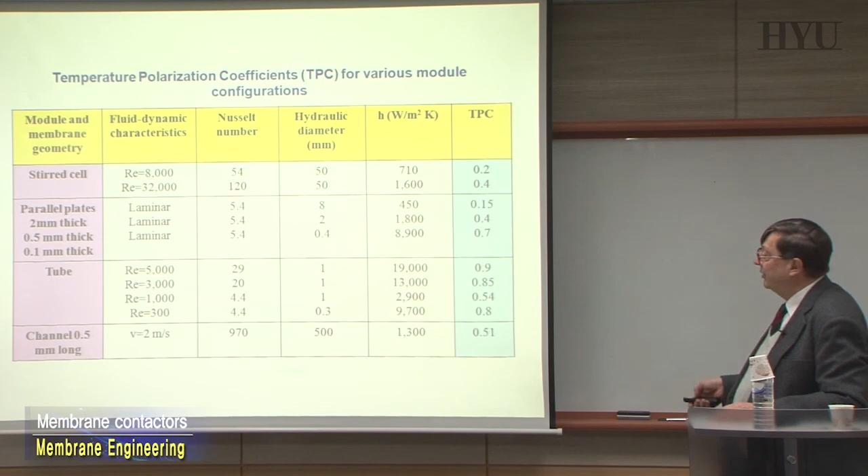Here you have a laminar case, and if you change the membrane thickness, you get 0.15, 0.4, 0.7. That means when you are going with relatively smaller thickness of your membranes, you can improve the temperature polarization control, still not approaching the ideal value, but much better than 0.15, and so on. That is the effect the Reynolds number can have, and that is the typical case.

Also in this case, if you want to find the expression for your heat transfer coefficients, you can use traditional adimensional numbers. You can find in the literature the Nusselt number, the Prandtl number, and the Grashof number, and these give you the possibility to evaluate the overall expression correlating the Nusselt number with the heat transfer, here in the Reynolds, through laminar flow, turbulent flow, etc.

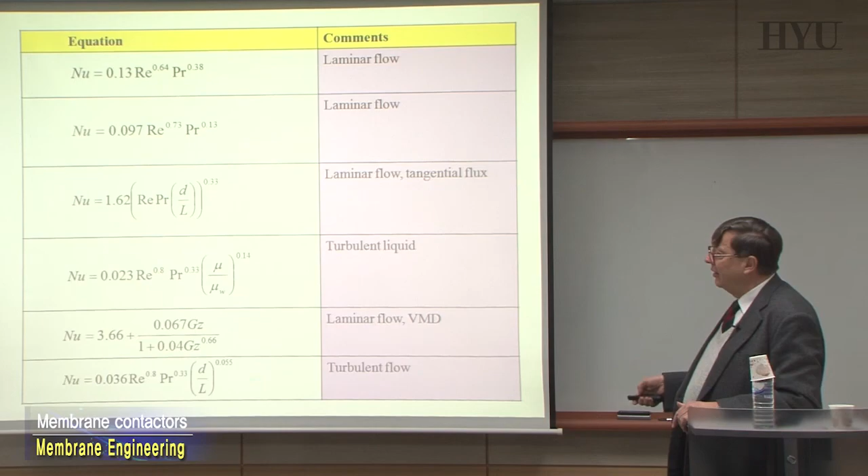Also here you can see these equations are not the same. If you look at this equation, each one of these exponentials, this term alpha, beta, gamma, each one depends on the reference—we forgot to put the reference—but each one of these is something different depending on the overall configuration, but also on the different experimentalists. People made experimental evaluations. These are all phenomenological parameters. There's no theory that you can develop. And these numbers, you can see they are not too far apart, 0.33, 0.38, but basically you have to develop your own relationship. Okay.

Again, there are some other terms that we have to consider, very interesting here. Basically, we have been defining that the overall transfer across the membranes is related to the latent heat, to the evaporation of our molecules, and to the warming up of the membranes, the conduction to the membrane material.

This is a question that we have to consider, and in fact the heat transfer coefficient has to be redefined, introducing all the parameters related to the membrane morphology. So you have to introduce in the definition of your transfer coefficient this porosity, the thermal conductivity of the solid, Ks, and the thermal conductivity of the vapor.

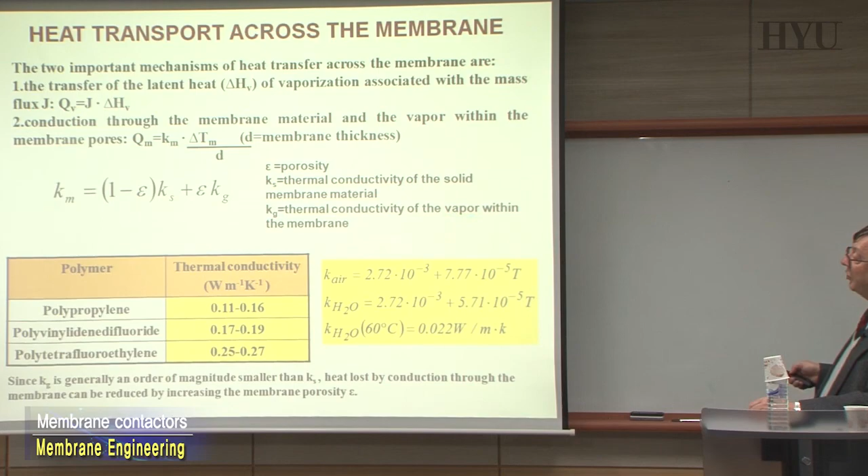Within the membranes, normally we are assuming that when you start the operation you made vacuum, there is no vapor already, but there is some vapor, and so the thermal conductivity of the vapor within the membrane has to be considered.

And this is always related to the real empty space, the overall porosity. Again, porosity is not an easy parameter to define, because depending on the tortuosity, depending on the morphology of the channels, these terms are not easy to predict.

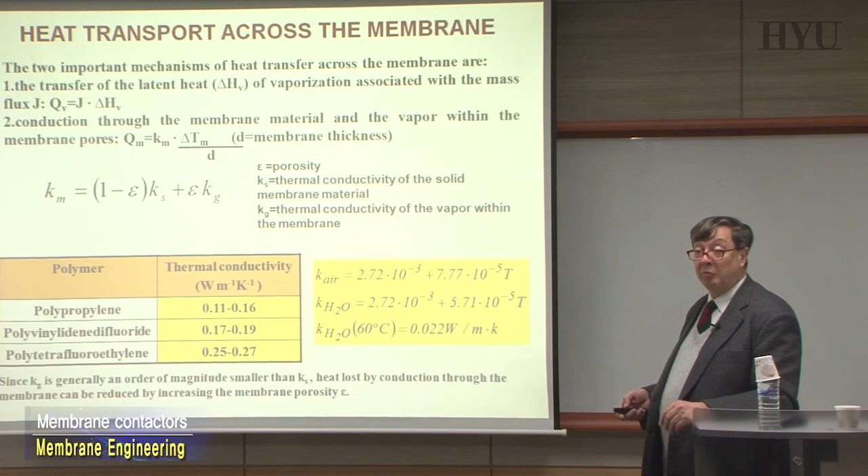But these are the parameters that you have to control when you make your membranes. You have been learning in the past discussion how much we can change the overall morphology depending on what we need. That's why we always say that when you make a membrane, rule number one is the application you are looking for, because depending on what will be the end operation of these membranes, you have to change the parameters, and look to change something in one case, something in another.

For example, if you're looking at this kind of application, membrane distillation, you have to take care first of all of the thermal conductivity, because otherwise this term would be a penalty for you. We are moving from, we are using basically today polypropylene, PVDF, and Teflon, and you can see there's not too much, but there is a difference in thermal conductivity.

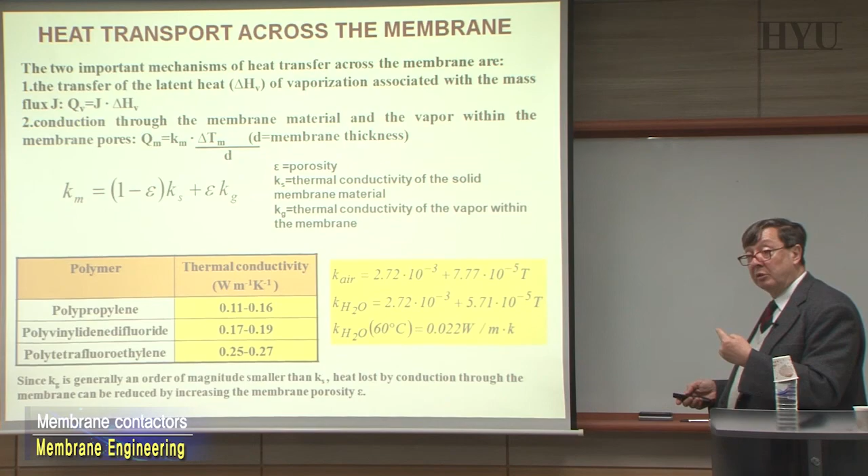And that means an influence on 50% of the energy we are consuming, as I mentioned before. That's why today people are studying new polymers and eventually also some hybrid membranes where you can try to induce change in thermal conductivity by making some composite membrane. You can have some fillers which can change the overall thermal conductivity of the system. If you make this kind of membrane, that can be quite interesting for membrane distillation.

Just to give an evidence here, how much this transmembrane flux can change with changing the membrane thermal conductivity. You can see that depending on polypropylene, PVDF, and PTFE, we have a quite interesting variation, and that's the thermal efficiency that also is changing—how much of your heat is really going to the evaporation or is lost.

And that depends very much on the value of the Knudsen diffusion, meaning how much we have molecular diffusion or Knudsen diffusion. That is a question of the size of the pore, as we learned before. You can assume Knudsen diffusion for narrow pores, molecular diffusion for bigger pores, and that depends on how you make your membranes.

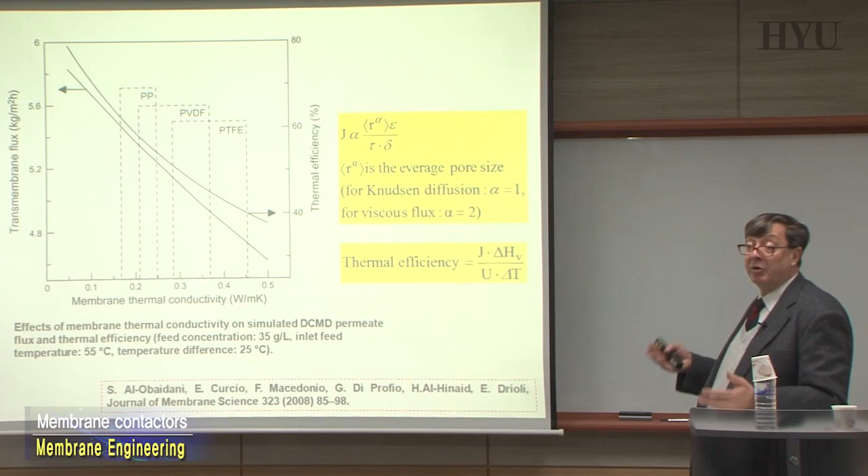So today, in the meantime, we want to produce membranes with high porosity, and so big pores. But big pores can lead to more molecular diffusion than Knudsen diffusion, and that is something you have to understand: which one is more convenient for you? Do you want Knudsen diffusion or molecular diffusion? That is one of the objectives in the design of this kind of system.

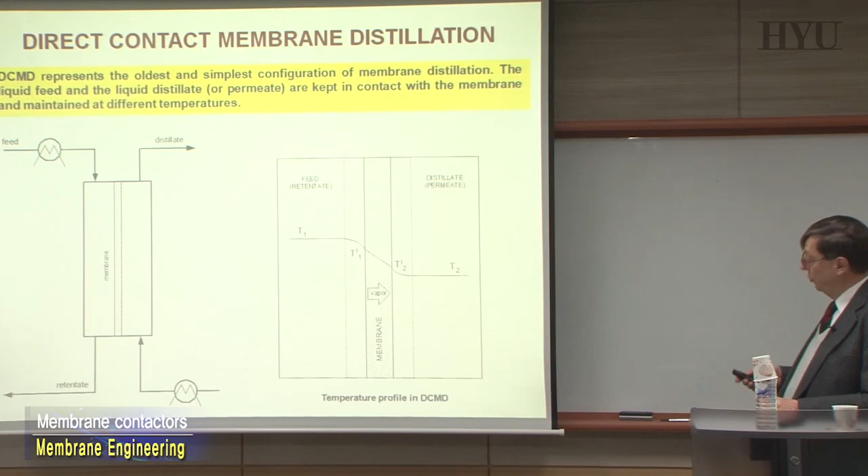If you go in the literature, you will find that these phenomena are never linear—we will see next time—they go through a minimum or maximum. You can increase the heat, and in principle you are increasing the transmembrane flux, but in this way you are producing another problem, losing more of the heat in the warming up. So there is always a question of optimization, and we will discuss this next time.